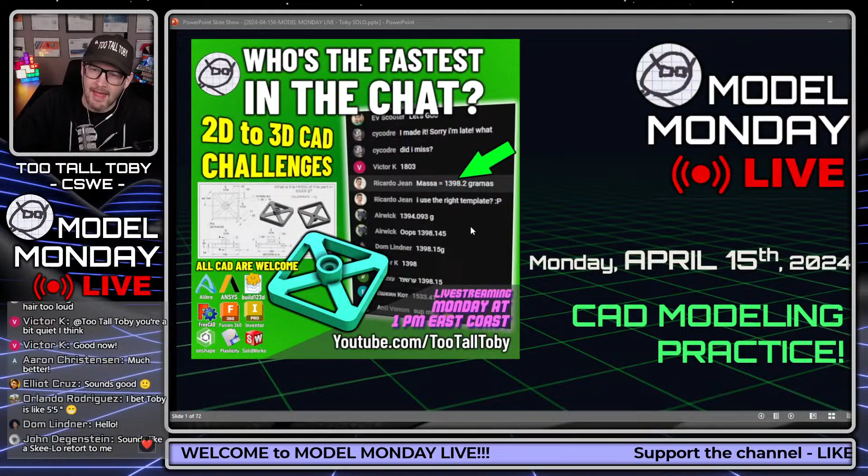So let's get right into it here. Model Monday Live kicks off April 15th with some 3D CAD modeling practice, some friendly competition amongst the chat. Who is the fastest 3D CAD modeler in the chat? That's what we're going to find out today on this episode of Model Monday Live.

Look at that, it looks perfect. Aaron C says he's been traveling a lot the past couple of weeks, so he hasn't been able to participate, hopefully he can catch up on the leaderboard today. Well Aaron C, we've actually been off for the past 2 weeks, so perfect timing, we took off. We knew you were traveling so we took off for a couple of weeks, now we're back.

It says hopefully I can catch up on the leaderboard today. Yeah, the Model Monday Live leaderboard at TooTallToby.com, everybody's vying for first place on that leaderboard. Aaron says, I plan my trips around TooTallToby Model Monday. Yeah, that's a great strategy, solid strategy.

So today we're going to do 2 CAD speed modeling challenges for the chat. Anybody who's in the chat using any 3D CAD system can participate, and we're going to find out who is the fastest in the chat. We're going to do a little bit of a tournament and news update, we're going to do a live solve using SolidWorks, and of course we're going to interact with the best chat ever.

I'm going to live solve this one today. I had somebody in the comments say they wanted me to solve this using SolidWorks. So this is one that came from the tournament, the square cap. We also had this one as a practice model, so we're going to do this as a live solve a little bit later in the episode today.

Pretty straightforward part, but I think it's good to kind of go over some of these straightforward parts. It doesn't matter if it's a tier 1 or a tier 5 or even a tier 10, it's always good to have the opportunity to talk through what we do whenever we're looking at a 3D model, whether it's a very simple model or a more difficult model.

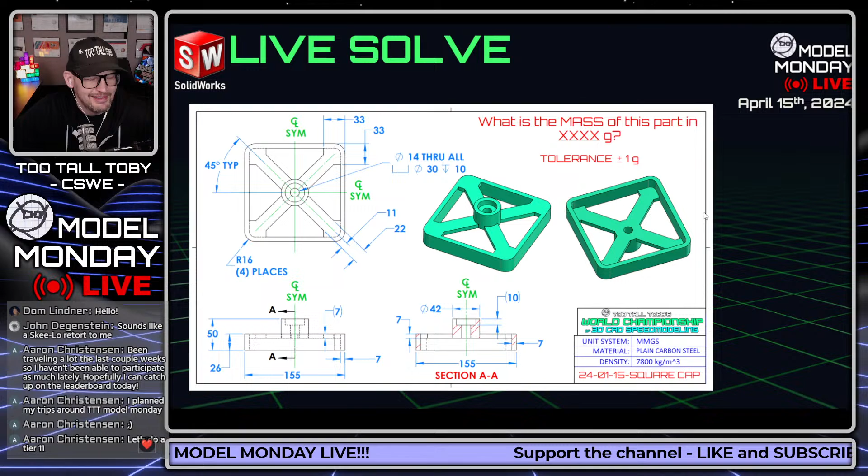Aaron C says, let's do a tier 11. Let's go. I'll just show you a picture of a guy's face, say hey, model this. First person to get it right wins.

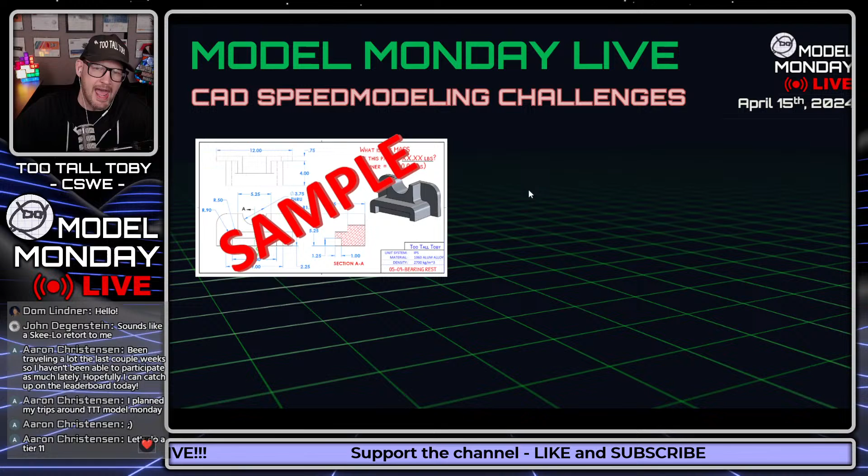In these CAD speed modeling challenges, I'm going to show the chat a 2D print, and ask you to turn that into a 3D model as quickly as you can. You're going to try to calculate the mass of that 3D model and input that mass directly in the YouTube chat. Whoever comes up with the correct mass the fastest will be declared the winner.

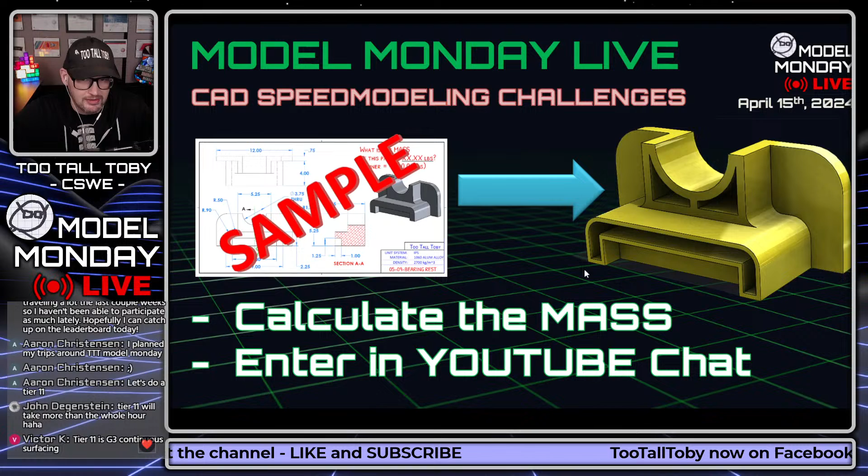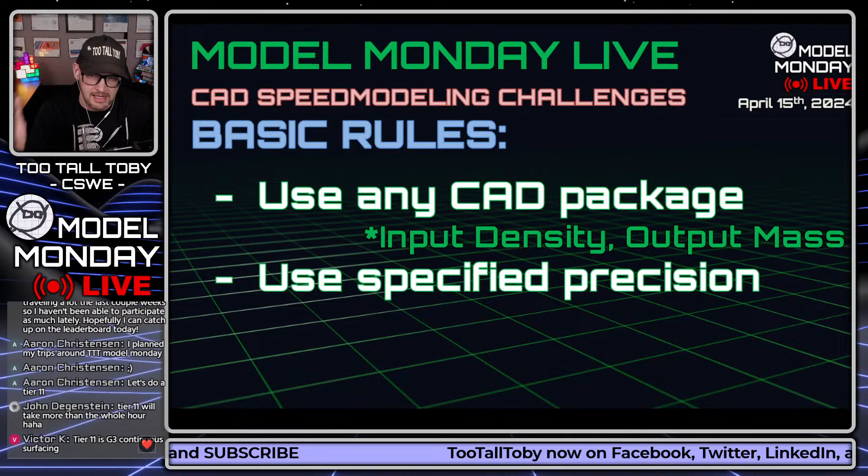The basic rules are you can use any 3D CAD package as long as you can input density and output mass. You need to make sure you use the specified precision. If the model is in inch, pound, seconds, and the answer is 0.xxx pounds, use the specified precision, or you could go more precise. But if you go less precise, you're probably going to go outside of spec. The first correct answer in the chat will be declared the winner.

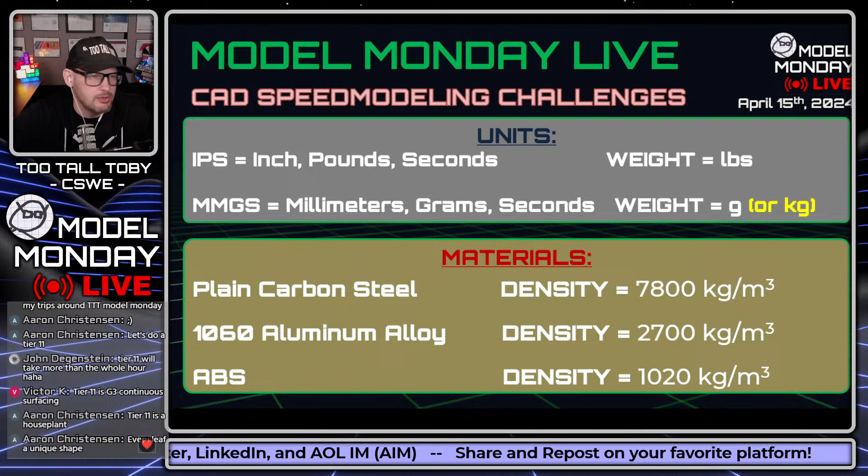The units we work in Model Monday Live are shown here on the screen. If you're here for the first time, take a sec and grab a screen capture of these units, and especially of these materials, because in your CAD system the materials might be a little different. I've got a tutorial on the Onshape YouTube channel showing how to create custom materials in Onshape. But if you're using a different CAD package like Fusion 360 or FreeCAD, you might have to go through and create your own custom materials.

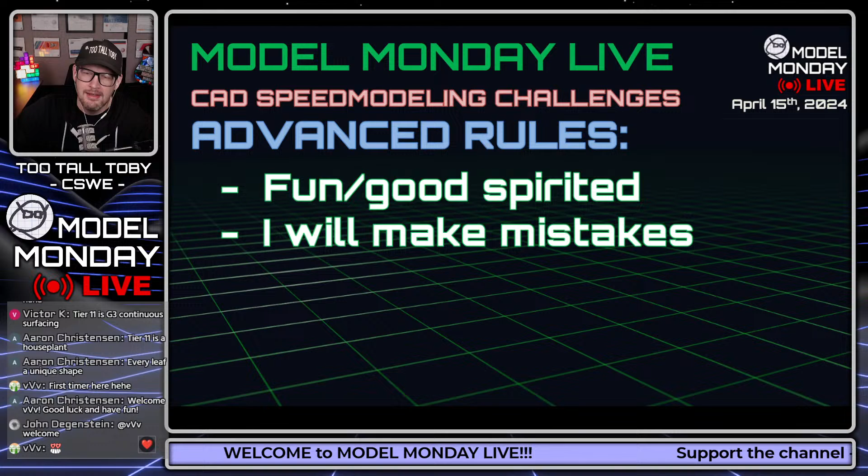The advanced rules are, this is meant to be fun and good-spirited. Occasionally I make mistakes, I include the incorrect density on the print, or maybe have a bad dimension, or a tolerance that's too tight. If that happens, we'll just call an audible and figure it out. And the Ivan exploit is permitted. Video coming soon demonstrating the Ivan exploit.

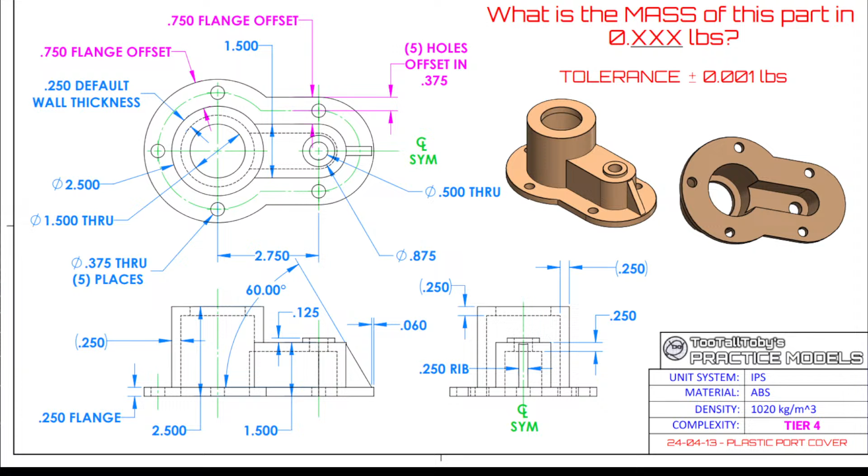And those holes are offset in from the outer rim at 0.375. The model has a consistent wall thickness of 0.25 default wall thickness, except in that one area where you can see there's a little raised, 0.125 raised area. That is the plastic port cover, a new model for this episode of Model Monday Live. Trying to make sure I keep giving you guys as many new models as I can.

Let's see what we can do about getting this centered on the broadcast. There we go, it's just that easy. A new model for this episode of Model Monday Live, 24-0413. Tier 4 model, kind of in between Tier 3 and Tier 4.

But really Tier 4. I'd say actually, maybe I'm being a little too rough there. It is really like square in the range of Tier 4, if we look at our tools that we use to calculate the tier ranking for a model like this.

Da Vinci is here in the chat. What's up, Da Vinci? Welcome, welcome. All right, good luck to everyone.

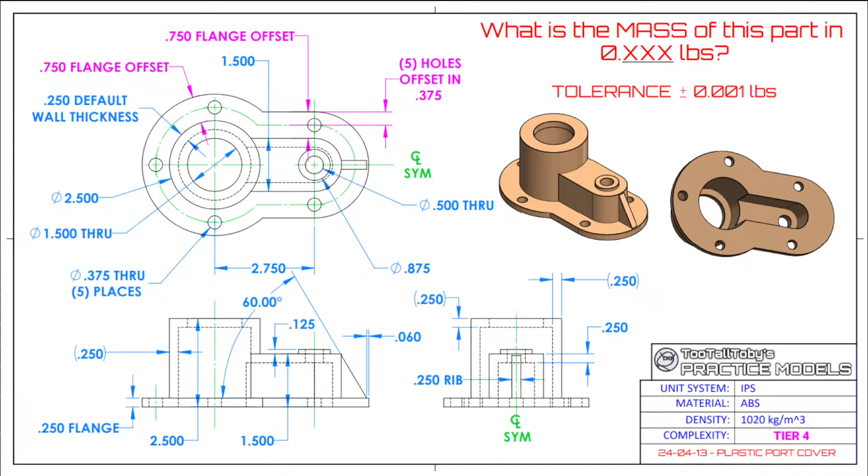Turn that into a 3D model. Tell me what the mass is: 0.xxx pounds. Tolerance is plus or minus 0.001 pounds. Very tight tolerance on this one. Usually it's around there though, right? Sometimes it's even tighter. All right, good luck creating this model. This will be a fun one, I think, for everybody out there, depending what CAD system you're using.

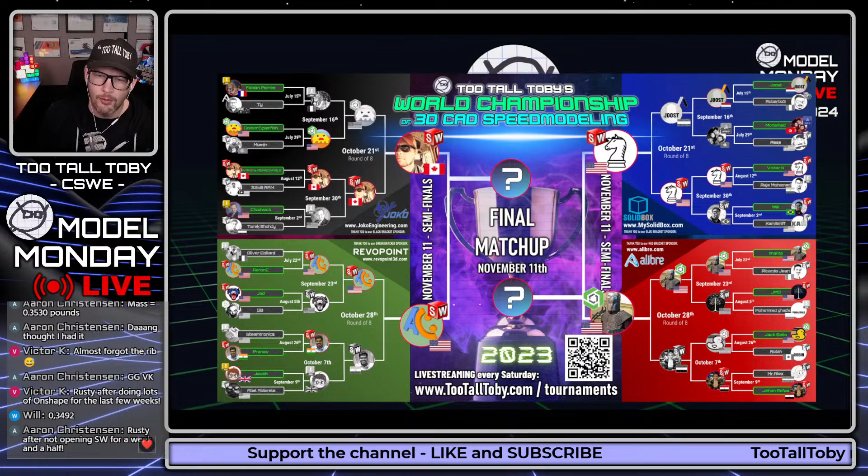Of course, last year we had the World Championship 2023. We had 4 amazing finalists, 2 of whom are here with us right now today in the form of Victor K and Aaron C. And then, of course, we also had Ivan the Reasonable and Imants going into the Final 4. And it was none other than Victor K himself who took down the entire tournament. First place in that tournament, some great prizes, some prize money. And so we're looking forward to seeing what happens in the World Championship 2024.

Of course, we're going to make some changes. We always are trying to mix things up a little bit, really dial in the formula. So we are going to make some changes going into the World Championship 2024.

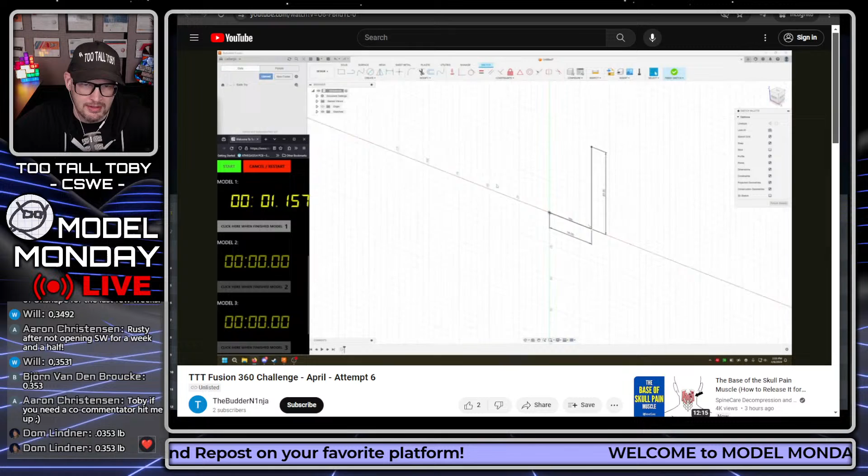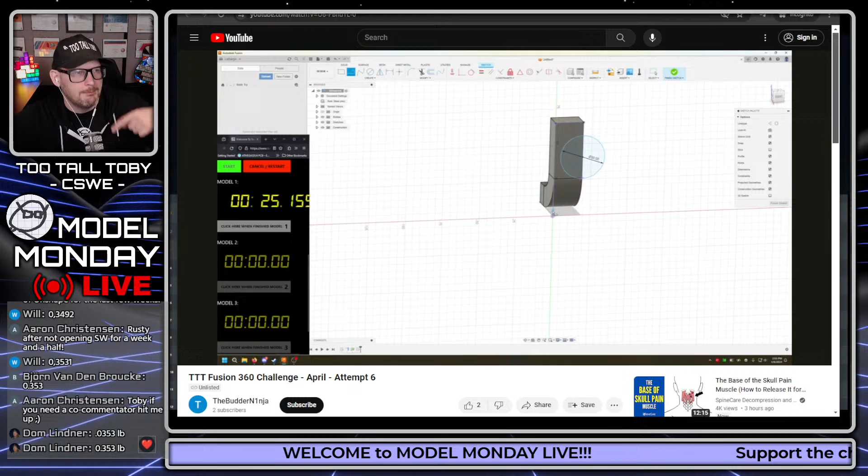One of the things that happens in these runs is that you've got the ability to exploit your CAD software if it remembers things. What I mean by that is, if we're running this here, look, this is running in real time, this is Fusion 360 running in real time on this run. You can see that for this first model, the user created a line horizontal, created a line vertical, and then went into that thin feature extrude really, really fast. Now, why did that happen so fast? It happened because the software remembered what the thin feature extrude parameters were from a previous run. The software just happens to be set up so that it remembers.

This is what Fusion does. SolidWorks does this as well, and you're going to see it here again in just a moment. So here you see that cut extrude. Now, watch this hole wizard that the user puts in here. Look at that.

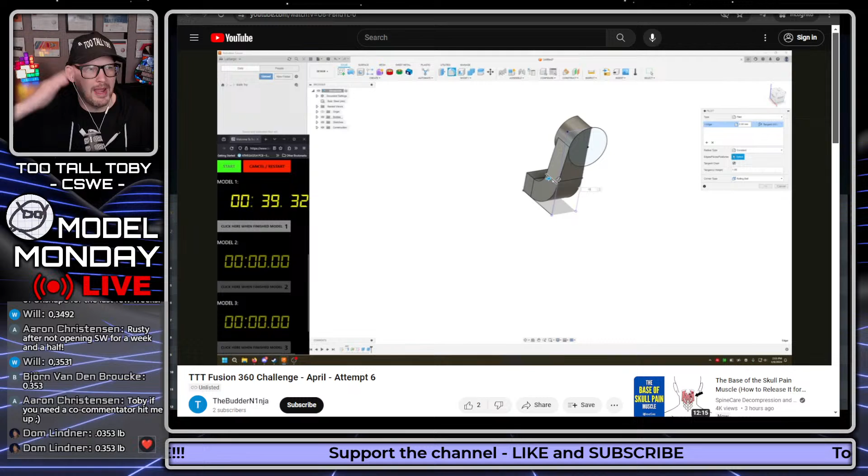That was like one click. I'm going to rewind it there. One click and the hole wizard just ended up dropping in the correct size hole. Well, this is the same thing that SolidWorks does. SolidWorks remembers what parameters you used the last time you used Hole Wizard.

And this is Fusion 360 we're looking at here. It's not called Hole Wizard, but the hole creation tool works the same way. Here, I'll rewind it one more time. So you can see the user just was ready to create that hole, clicked on that point, boom, the hole gets created, dropped right in the exact correct spot with the exact correct parameters.

And this is actually an exploit that I've included in the rules. So here, if you look at the leaderboard challenge rules, you can see it's rule 3E. Some programs like SolidWorks will remember your settings from the previous use of a command. This is an exploit which is allowed for submissions to the monthly leaderboard. If you can figure out a way to work this for your program, go for it.

And so it's one of these things where Dom is saying he wasn't sure if that was allowed, if we had to clear the whole custom hole wizard sizes. No, I can't stop this, like I wouldn't allow it if you went into Hole Wizard and pre-populated a list of all the custom holes used for that challenge. I wouldn't allow that. I would consider that against the spirit of the contest, because you're specifically programming that list for this challenge. So I think that would be off limits.

But the software remembering what you did on the previous run, I can't really stop people from doing that, because what am I going to say? Am I going to tell people whenever you go into Hole Wizard, you have to delete the value, which is the correct value, and then retype it in? That seems a little crazy that some people would have to do that. And it would be very hard to convey that as a rule as well.

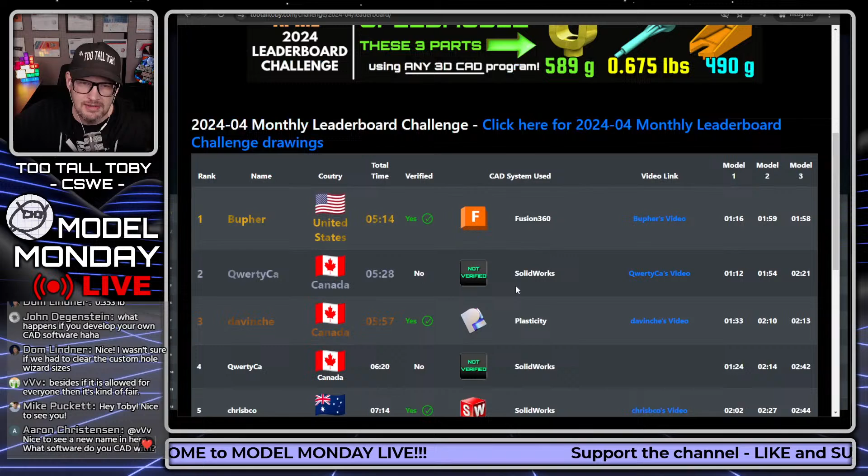And sometimes it's nice just to see other CAD software, like DaVinci went in and did a run in Plasticity. Awesome. So a little later today, oops, maybe I wasn't showing my screen for that when I went back and showed that again. But DaVinci, you can see here, went in and did a run in Plasticity, so you can watch a video of DaVinci running Plasticity, doing the leaderboard.

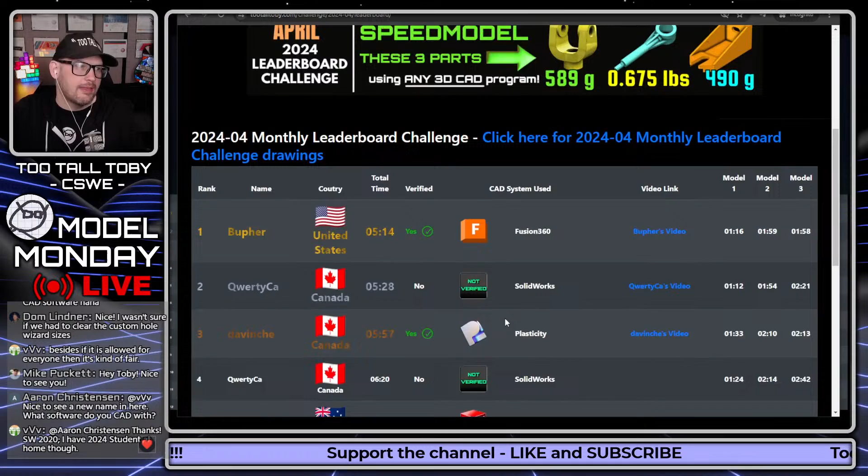Later today, I'll go in and I'll get QWERTY's run and verify it. I'll delete this extra run down here. There's also a new rule in the leaderboard now where you can run it using multiple CAD systems.

So here, if we look at the rules again, the way your time will be shown is once you submit your time, you can continue submitting speed runs to get better times. Your fastest time will be considered your official submission. All slower times will be deleted.

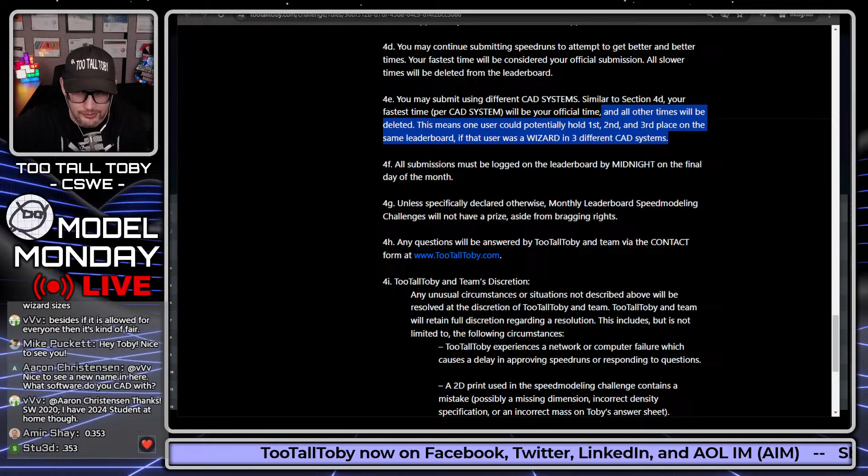But then here it says you may submit using different CAD systems. Similar to section 4D, your fastest time per CAD system will be your official time, and all other times will be deleted. This means one user could potentially hold first, second, and third place on the same leaderboard if that user was a wizard in 3 different CAD systems. Pretty cool stuff. You can actually run it using multiple CAD systems now.

Take a look, there's a new section for the video rules. If you want to see me going through and explaining the new rules, those are all listed here. If you want to see my run from April using SolidWorks, that's shown here too. And if you want to give it a try, the leaderboard is up, running, and active.

And of course, we're still releasing videos all the time. Lots of power moves, lots of practice models, lots of shorts. We're doing shorts every single day, every single day since January. We're almost on day 100 of releasing a new short every day.

One thing that's kind of cool about the shorts, I didn't really think about this until just recently, but the way I'm doing those shorts is it's always one run, almost always one run. There's almost never any edits in those shorts. So it's like I'm giving myself a new engineering constraint.

I need to convey to you a pro move that is going to be valuable to you, but I need to do it in less than 60 seconds, and I need to do it without any editing. So whenever you're watching them, or if you share that with somebody else...

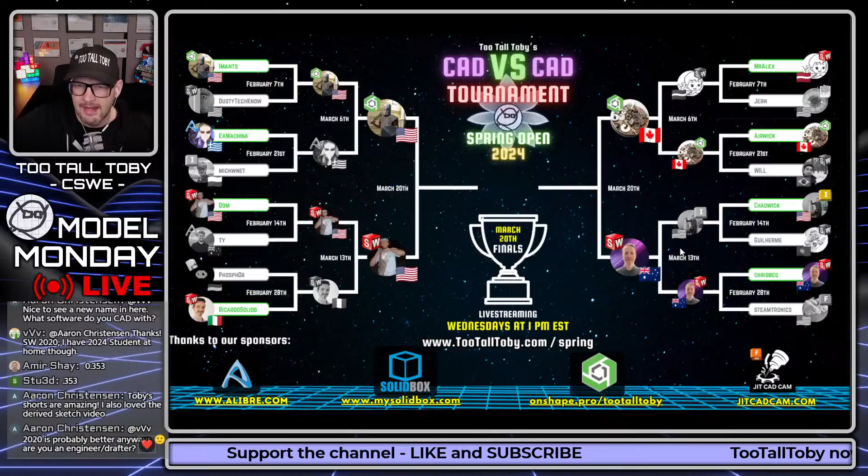Alrighty, and the Spring Open Final Four recap. Imants, once again, in the Final Four, very nice. Dom, Airwick, and ChrisBCo were all in the Final Four, and it was none other than Airwick who took it all down, our 2024 Spring Open champion. The reason I'm mentioning that is because Airwick is going to be joining me next week on Model Monday Live. We got a special guest next week, our winner from the Spring Open is going to be here and joining us. So very excited to sit with Airwick and talk to him about his strategy for these modeling challenges.

We often see him here in Model Monday Live, we always see him in the practice models, regular here on the show and in the community, and very excited to talk to him next week about Onshape and why he switched from SolidWorks to Onshape and how he was able to lock down that win.

Airwick had a brutal path to victory, and a lot of his matches went to 3 matches. It was really cool. So maybe I'll put together a highlight reel of all Airwick's matches all the way through the tournament, because that would probably be a lot of fun to watch.

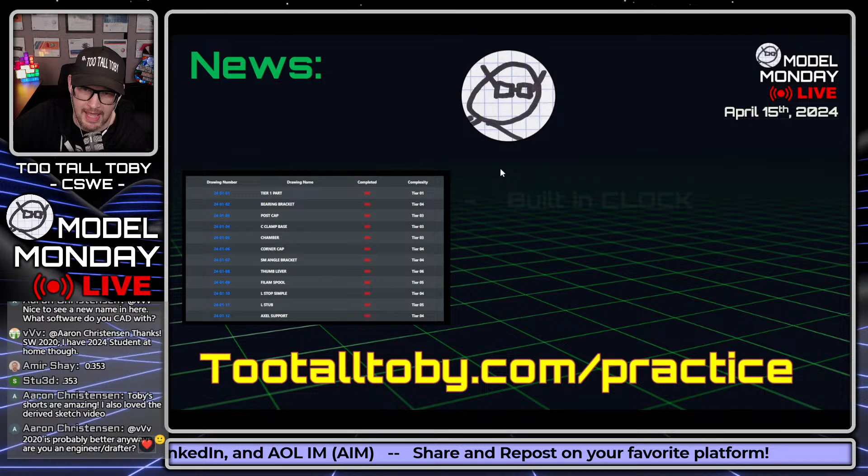All right, I think that's it for the TTT news for now. The practice models update - yeah, we do have a practice models update. There's 34 models up there now. So good luck if you want to do the practice models. They're a lot of fun.

There's a built-in clock, there's tiered level difficulty. If you haven't checked out TooTallToby.com before, when you go there, the idea with this page is there's basically 3 avenues you can go down. You can go down free practice, which is like you against yourself.

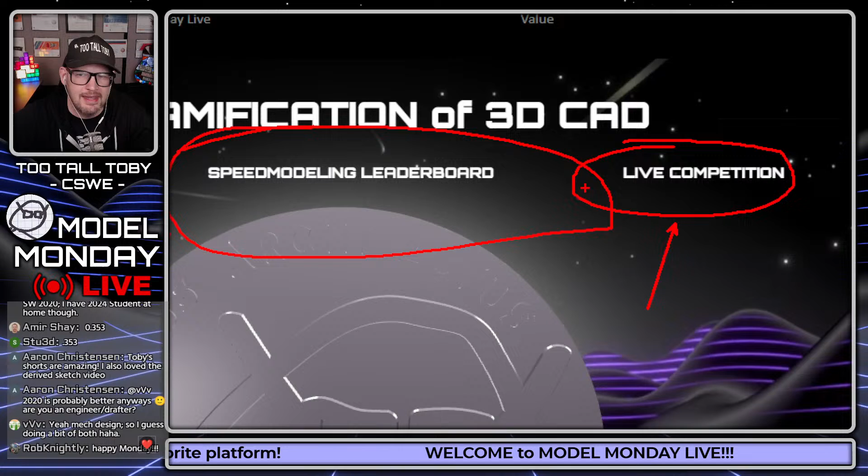You're not going against anybody other than yourself there. There's a speed modeling leaderboard where it's you against the community, but you can practice as many times as you want over and over again. Or it's the live competition, you versus somebody else, CAD versus CAD. That's like the Model Monday Live and the tournaments. Those are the 3 avenues you can go down on the website.

We talked about the speed modeling leaderboard a moment ago, but the free practice is a little different. With the free practice, we have these challenges where you get into the challenge, and once you get in there, there's going to be a clock, and you're going to see how long it takes you to complete that challenge. This one took me 6 minutes and 58 seconds to complete.

We're actively working on this section of the website right now, the Practice Models app. We're going to give you guys more and more functionality, but just keep in mind that as you're going through those, it's intended for you to look at the print and do the challenge. You're not supposed to go back and keep trying or peek at the print ahead of time or anything. It's really meant to just look at the print and then do the challenge.

So if you want to check this out, TooTallToby.com/practice, lots of free challenges in here for everybody to try. I think we're up to 34 now. If we go to the community scoreboard here, you can see, yeah, there's 34 total. And you can also see here that there's over 200 people that have done at least one.

So it's been a lot of fun getting this out. Look, we got a Creo guy in here. That's pretty cool. It's been a lot of fun getting these out there.

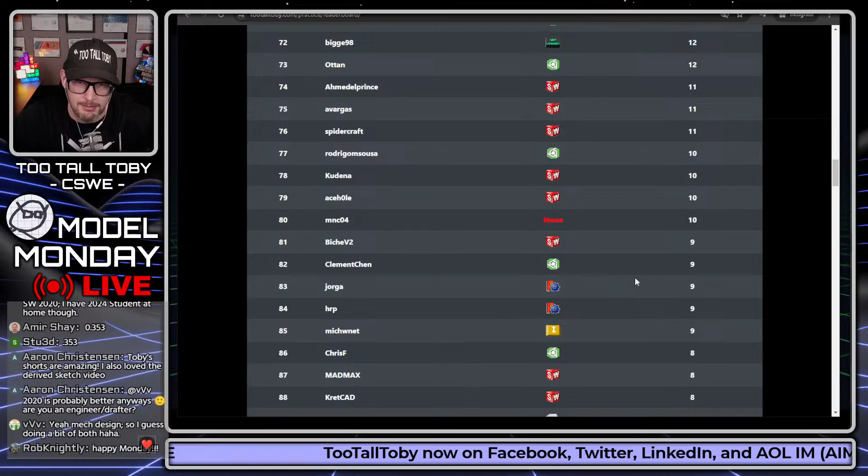And I'm going to continue releasing these models. There'll be more that go up today, and they are listed by tier. So if you only wanted to do certain tiers, you could turn on the filter here and say, I only want to see tier 1, tier 2, and tier 3. I don't want to do any of the other ones. I just want to challenge myself to do these ones here.

So you can filter these whether you're looking at it in the grid or in the standard view. These are all tier 1, tier 2, tier 3. If you're not ready for anything higher than that yet, that's fine. You can just start out on those beginning ones.

Rob Knightly here in the chat. What's up, my man? And I saw Mike Puckett in the chat too. What's up, Mike? Welcome, welcome. Thanks for joining us. I saw you pop in there, say hello. Always great to see Mike here in the chat. Old friend of the show and old personal friend as well.

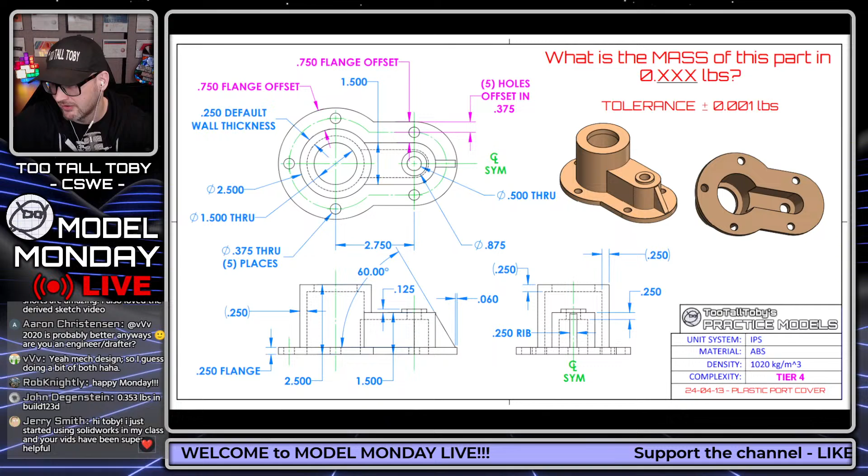Hi Toby, I just started using SolidWorks in my class, and your vids have been super helpful. Thank you, Jerry. Don't forget to check out TooTallToby.com/practice as well, more great practice for you and for your class. Are you a teacher or are you a student in that class? Let us know, let us know.

All right guys, let's take a look here, see how we're doing for this first challenge. I saw Victor K came in with the first answer and then like an insta revise. So here on Model Monday Live, you can answer and then you can revise.

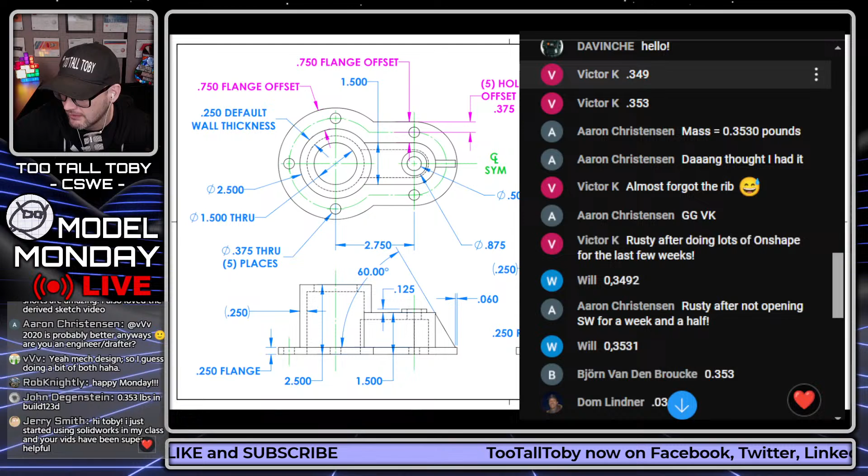0.349, Victor K. 0.353, Aaron C. Aaron C says, dang, I thought I had it. Victor K almost forgot the rib, GG Victor K. Okay, Will from Brazil, 0.349, matching Victor K there. Oh, Will revising, 0.353. Bjorn, 0.353. Dom Lindner, 0.353. Amir, 0.353. Stu 3D, 0.353. Very nice, very nice. John, 0.353, built in build 123D. Very, very nice.

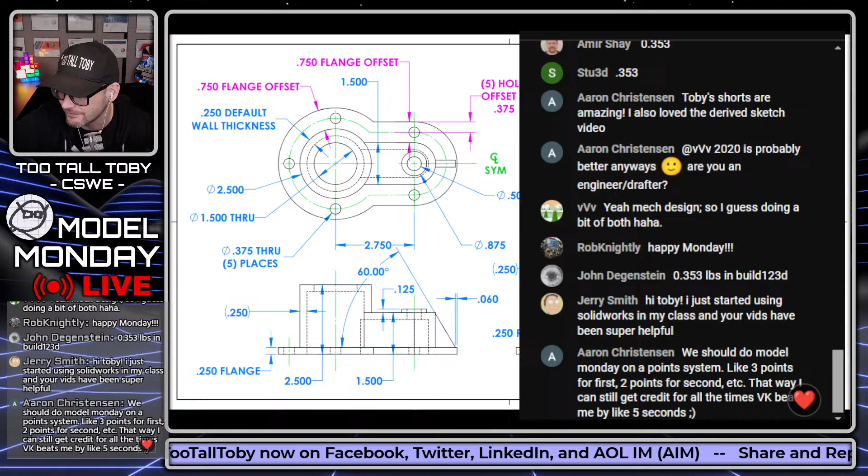Aaron C says we should do some kind of a gradient system. Yeah, we've thought about that too, Aaron C. Totally legit suggestion.

When we visit TooTallToby.com and go to Model Monday Live, you can see we do keep track of the points, but maybe having more of a gradient system. It's a process, we're developing all these different apps.

Right now our main focus is on practice models. We're really focusing on practice models. We did a little revamp of the leaderboard.

You noticed last month the leaderboard now is tied into your user profile. So when you go to edit profile, this information has to do with the leaderboard. This My CAD info ties into your leaderboard submission, as well as the monthly leaderboards, and this is where you post the link to your video run.

So everything is linked to from the leaderboard, from the speed modeling leaderboard. It's all linked back to your profile. That was a huge revamp that we did this past month.

And now we're really focusing on the practice models app. We got the leaderboard app updated, now we're really focusing on the practice models app. And then eventually we'll get to the Model Monday Live app, and we'll have a little more integration with that into the whole system too.

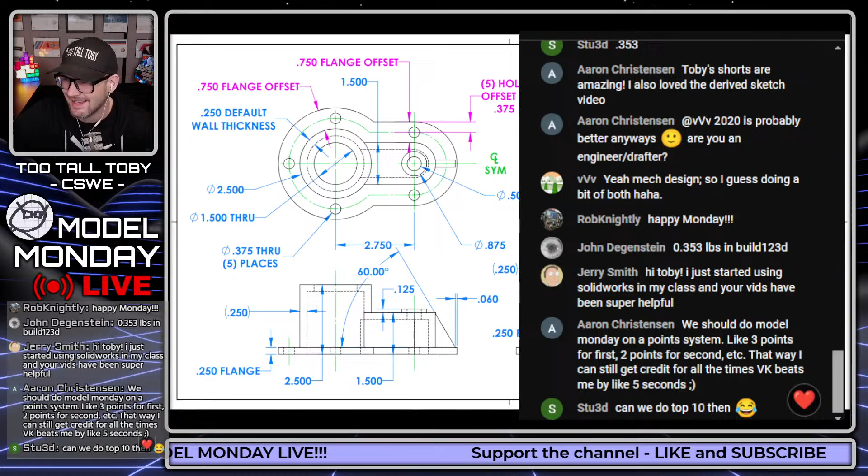So great suggestion. Stu3D in the chat says, why don't we just make it the top 10? I like that too. Great suggestion from Stu3D. Make sure that we get everybody in there - everybody who enters an answer will get in there.

Our very first answer came in from Victor K, 0.349. Victor K then revised to 0.353. The correct answer is 0.353. So GG to Victor K for getting that answer and getting it correct first and earning that point on the Model Monday Live leaderboard.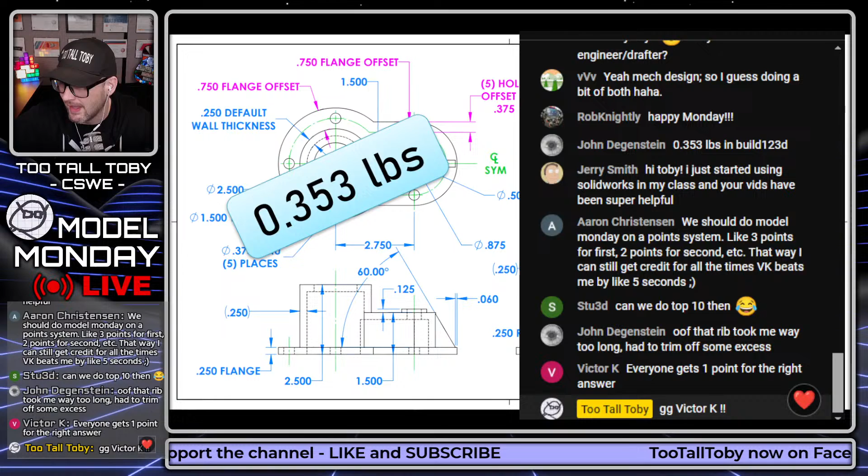GG to Victor K. Everybody give Victor K a GG in the chat. He is currently the world champion of 3D CAD speed modeling. Very impressive, continues to dominate in the streets. That's what we like to see. Who's going to take him down?

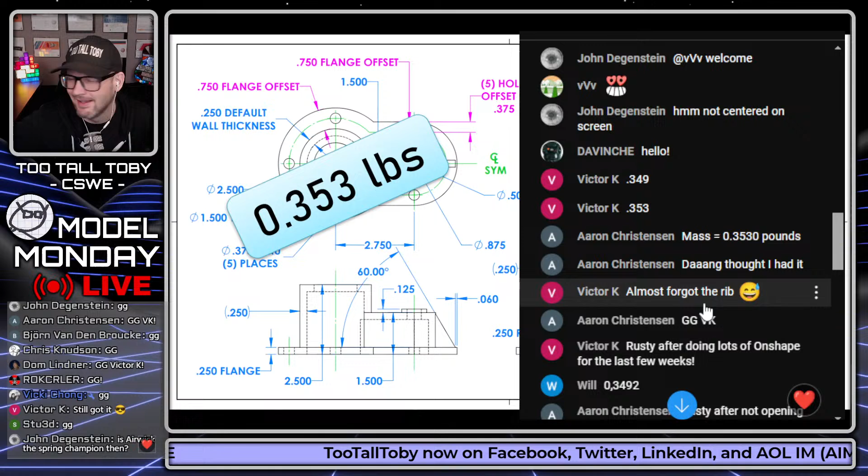You know, to be the best, you got to beat the best. Don't forget - I forget what movie that's from, but I'm sure it's important. If anybody can remember what movie that's from, tell me, and then I'll remember. Then I'll be like, oh, that's right, I just watched that movie. So, to be the best, you got to beat the best.

All right, congratulations to everybody who got that one correct, and let's move on to our next challenge today. Is Airwick the spring champion then?

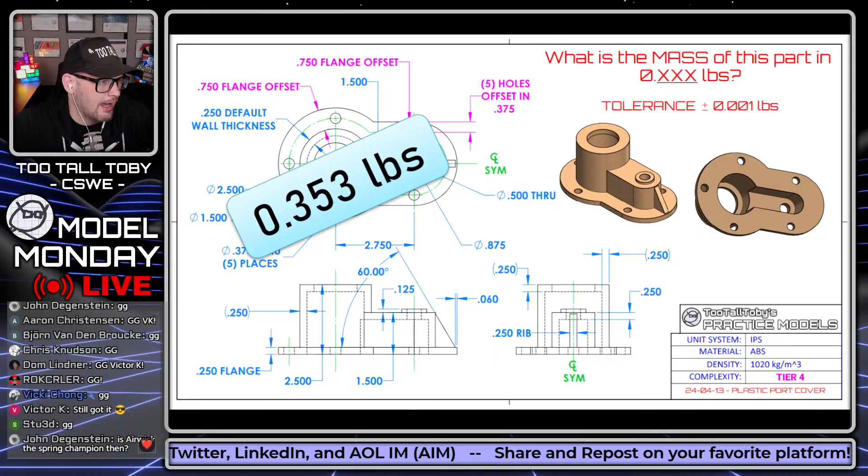Yeah, I mean, the spring opens are a little bit more casual. We don't have the international 3D CAD speed modeling regulatory board breathing down our necks the way we do during the World Championship. So it's a little bit more lenient in the Spring Open - it's almost like an exhibition type tournament. Airwick is the champion of the Spring Open for sure, but there's only one world champion per year in that international speed modeling sanctioned tournament, the World Championship.

PCRduino says he's teaching too many classes as of late. Oh, well, we're very glad to be here with you, PCRduino. Thank you so much for joining us, and thank you so much for being a teacher.

All right, guys, here we go. Next challenge. Challenge number 2 on this episode of Model Monday Live begins in 3, 2. Get your screen capture software ready. This challenge begins in 3, 2, 1, go.

What is the mass of this part in XXXX grams? Tolerance is plus or minus 1 gram. This part's made from plain carbon steel. We're back to millimeters - everybody loves millimeters. This is a tier 5 part.

Now, why is this a tier 5 part? Because it's a little bit tricky, that's why. It being tricky bumped it up from tier 4 to tier 5. So a little bit of a tricky part here.

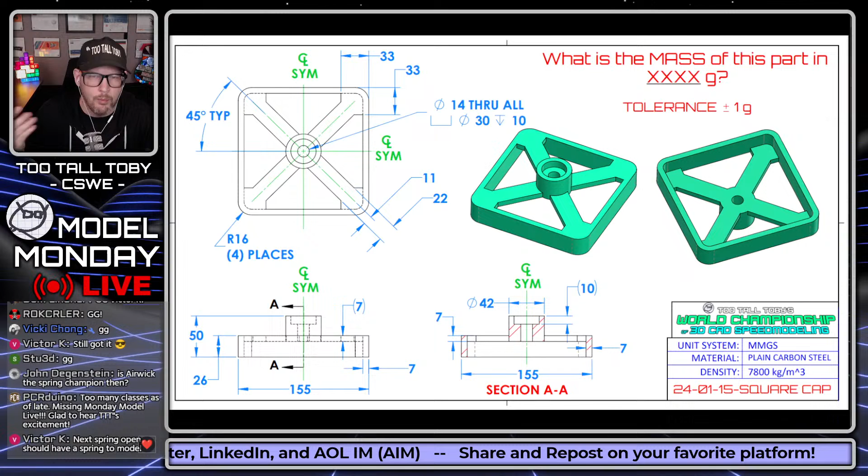So when looking at a model like this, and really when looking at any 3D CAD model, you always want to follow the same basic process of coming up with a game plan. So before you launch your 3D CAD software, before you start your first sketch, you really want to come up with an idea of what am I going to be making and in what order am I going to be creating that geometry. And there's some key questions you always ask whenever you're starting a new model.

The key questions you want to ask yourself are: where is the origin going to be located, and what is my very first sketch going to look like? A lot of times we call this starting plane, starting profile, and origin location. Starting plane means is it going to be on the front plane, the top plane, the right plane. Starting profile means what is my very first sketch going to look like?

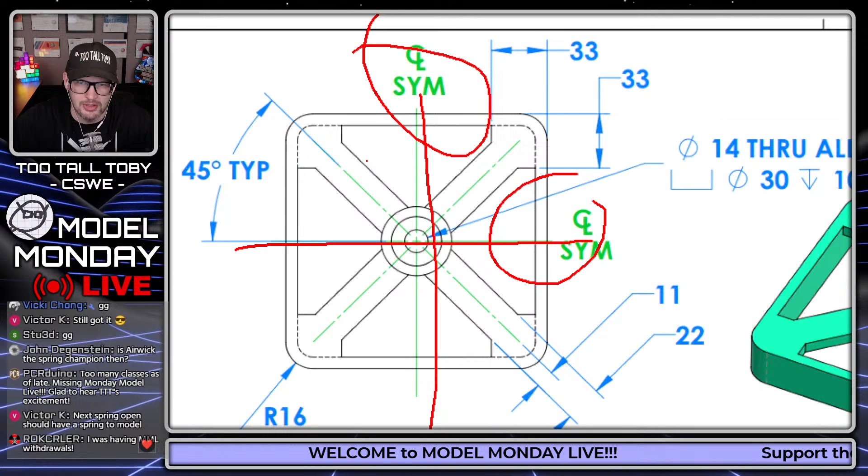Now, the way we come up with the answer to that question is we first start out by looking at does the model have symmetry in one or more directions? So this model does have symmetry in two directions, straight down through there and then across. We've got these centerline symmetric indicators. So whenever you have two lines of symmetry intersecting, that usually means the origin is going to be at that intersection. So the origin is probably going to be right here at the center of the part.

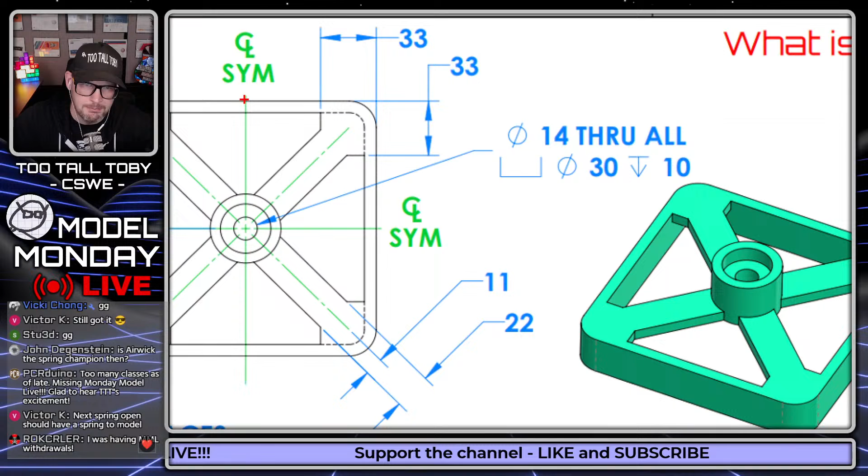Now the next thing we want to ask ourselves is does it make sense to create half the model or a quarter of the model and then reuse that geometry? And I think in this model it probably makes sense to do that. We could just create a quarter of the model and then mirror it twice. So now we know that we're only going to be creating a quarter of the model, which means that our first profile is going to look something like this, just one quarter of the model.

And once you have that first sketch planned out, you can extrapolate from there to figure out what the rest of the modeling process is going to look like. So maybe if the first sketch looks like this, then our first feature is going to be a solid extrusion that comes down and creates that first region of the model. Then we can maybe shell that solid extrusion to give ourselves a hollowed out version of this thing, kind of hollow this out a little bit. And then we could cut away this rib shape here.

And so at that point, what I would probably do is mirror that, and mirror that again, so mirror it in the two directions.

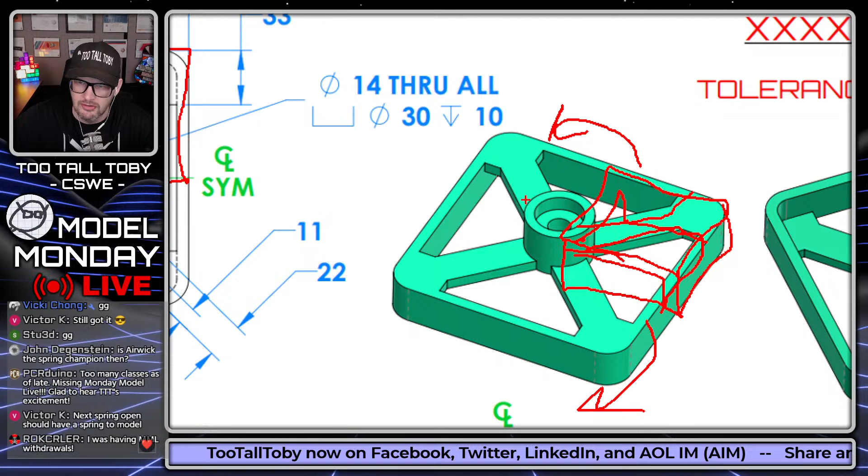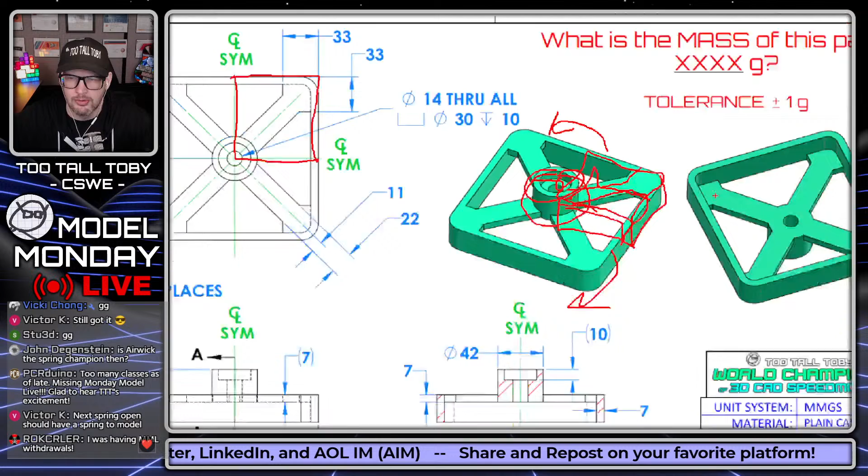And then I would finish up with this extrusion up top here and the counter bore that's going down through that extrusion. So this is the process you want to get into in your head. Whenever you're looking at a model, you always want to start out by thinking, what's my first sketch going to look like? What's my first feature going to look like? But you also kind of want to go through and think about what the entire model is going to look like as far as the different steps you're going to be doing as you go through and create the remainder of the model.

So now that I've got this basic plan in place, I just want to look at the model, see if there's anything tricky about it. It doesn't really look like there's anything that tricky. There's no crazy trigonometry I have to do or anything like that. I think the main thing is just going to be deciding how I'm going to handle this region as I'm designing just one quarter of the model. So let's get into it here. Hopefully the geometry will just kind of resolve itself in that center region. But if it doesn't, I'll come up with something as far as a solution goes.

So I'm using Windows snipping tool here, just grabbing a snippet.

ROKCRLER said, I was having Model Monday Live withdrawal. Yeah, well, it's great to see you in here again, ROKCRLER. Thanks for joining us again, bro.

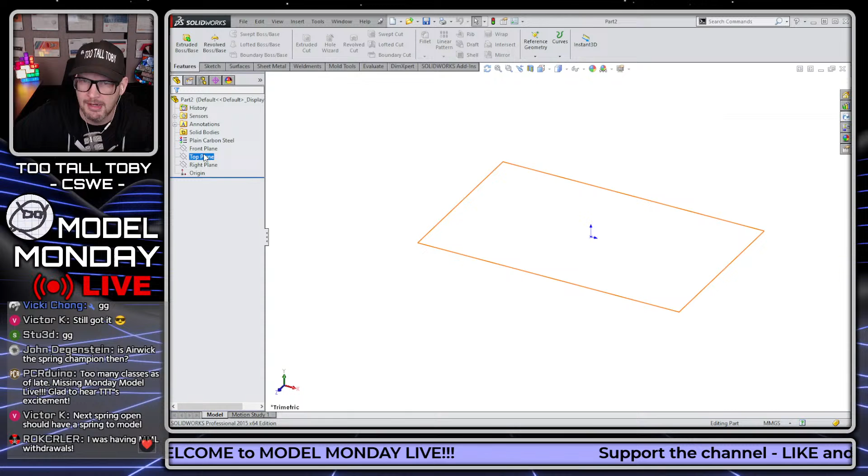All right, so let's get into it here, and we are going to jump into SolidWorks. We're going to make a new part here. This part is going to be in millimeters using plain carbon steel. So I do have some templates set up here to help speed along that process. And then I'm going to go to the top plane, begin to sketch, and I'm going to create a rectangle. So top plane, begin to sketch, S key, rectangle, single click the origin, move out here, and then I'm going to drop in the lines for that rectangle.

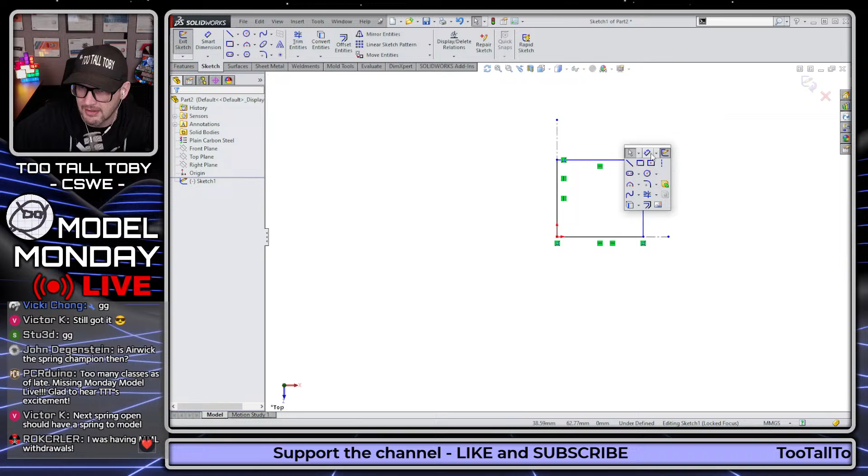Now, I could either drop in these lines for the rectangle ahead of time, or a little trick I like to use sometimes is I will create some center lines if I know I'm going to be using doubled geometry. So I'll create some center lines here, and then I can create a dimension from here to the center line and give that a distance of 155, and I can create a dimension from here to the center line and cross over and give that a distance of 155. And that gives me a nice, simple fully defined sketch to get things started.

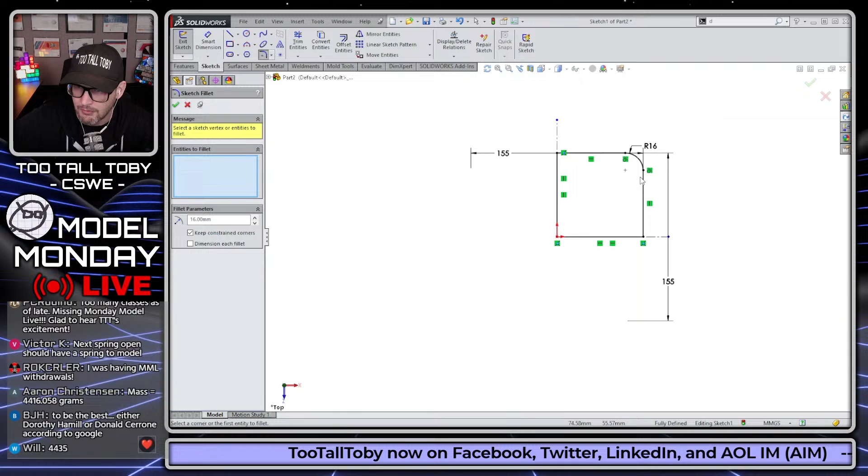It's always good to start out with simple geometry. Keep your sketches simple. So could I go in here and add that corner radius in this initial sketch? Absolutely. But whenever you add a radius, you're going to end up with additional tangency relationships, and sometimes you also get intersection points. And it just seems to me like maybe that's a little too much, a little too busy for this sketch. So a lot of times I try to keep my sketches simple.

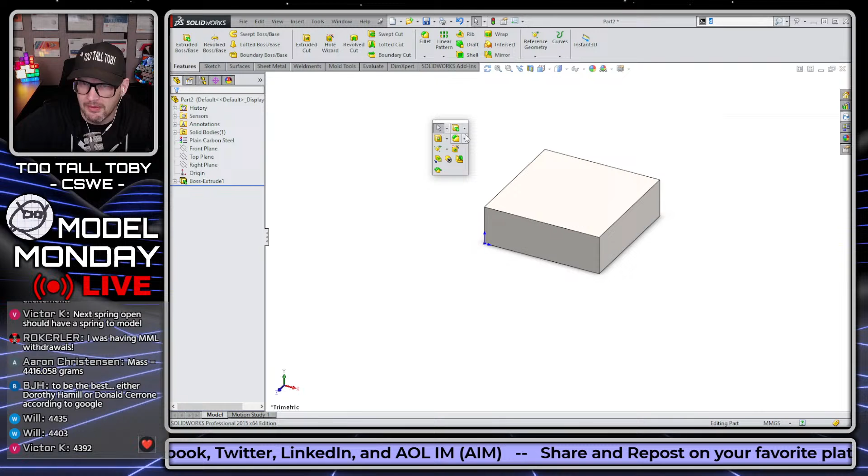So I'll just create that geometry, extrude that up. That's going to go up to a height of 26 millimeters. There we go. And then I will add a fillet. So S key, fillet, just pressing S on my keyboard, 16 millimeters, and add a fillet here right on that corner. And then if we want bonus points, we can go in and change the color of this part to kind of match the color on the print, also maybe make it a little easier to see as I'm going through the model.

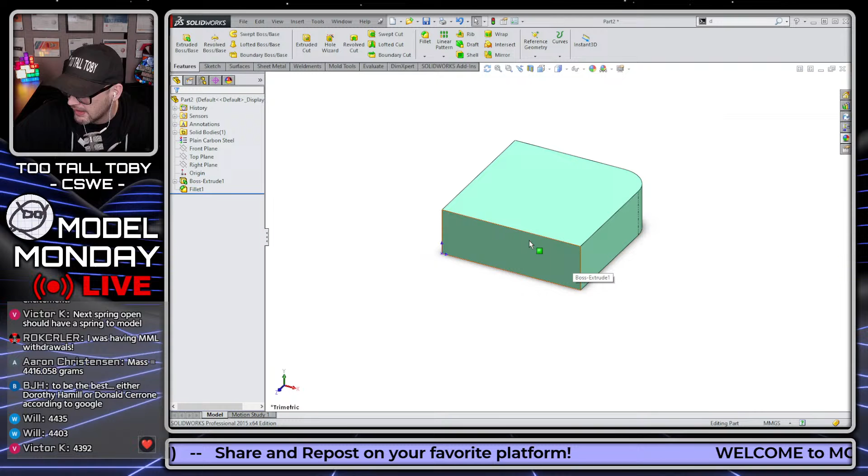So now I'm going to be creating the removal of that material from the underside. It looks like the wall thickness on the top of the model is 7 millimeters, and the wall thickness on the sides of the model are 7 millimeters. So that says to me, let's do a shell. And with a shell command, what you do is you pick a face, and then the geometry from that face is removed, and the geometry from all the other walls is offset.

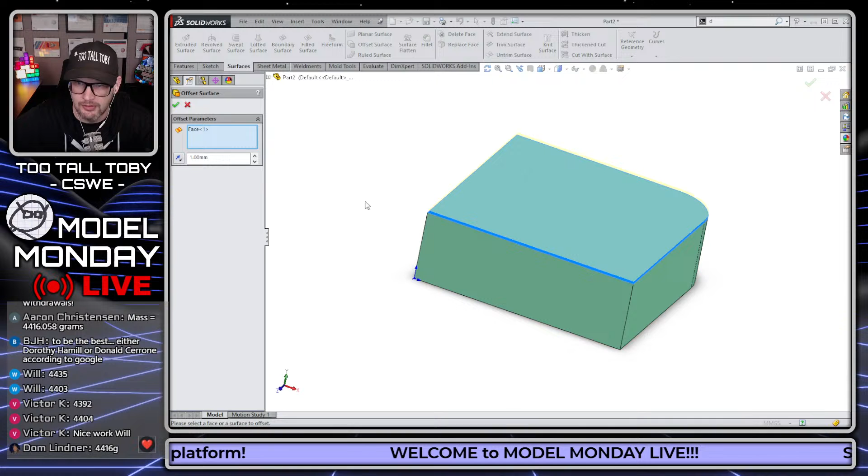This is performing what's called a surface offset. So it's actually taking this face here and going into surfaces and doing offset surface at the distance that you said, 7 millimeters, reverse the direction. There's that offset surface at 7 millimeters. You can kind of see it here along this edge, offset surface at 7 millimeters. Well, SolidWorks is doing that all throughout the model, leaving us with this kind of interior geometry.

If you've ever used a shell command before, you're actually doing surfacing, believe it or not. But it just kind of takes care of all that behind the scenes for us.

So this isn't quite what I want. Let's edit that shell command, edit feature. Let's say we also want to remove this face and this face. And now all the remaining faces are offset to 7 millimeters, and that looks like a pretty good start for this model.

So now we've got that shell in place. Now let's select this face here, begin a sketch, and orient our view. I did that with a Control 8.

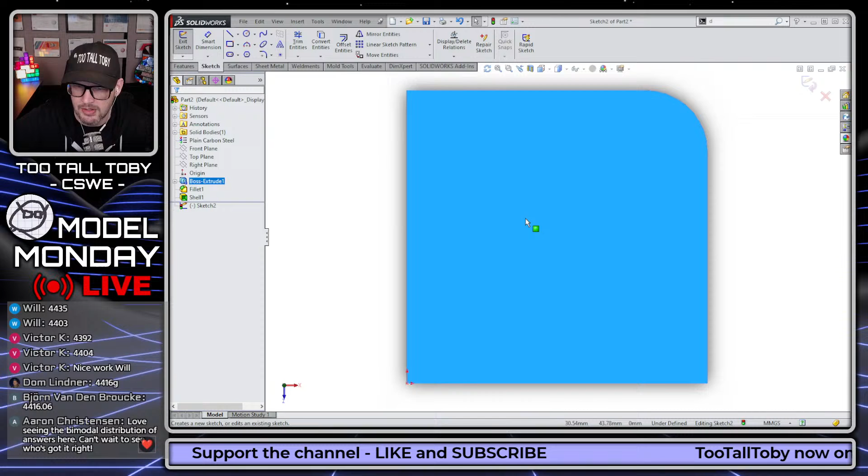Now we're going to create a line here. I'm just going to do this with a center line. Just create a center line here and then put in a dimension at 45 degrees. That should kind of help me get things aligned. It's also going to give me an option to maybe mirror the geometry when I'm done.

So now I'm going to create a regular solid line. S key, line, start here at this edge. And now I want this line to be parallel to that center line.

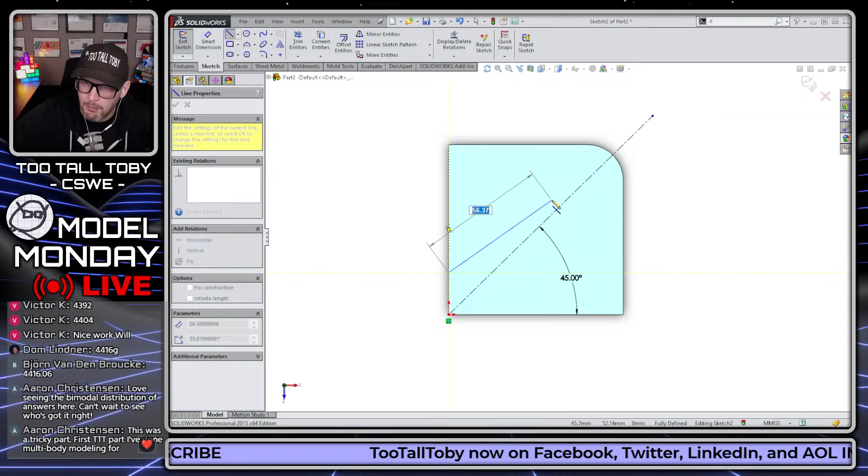In SolidWorks, a lot of times if you just hold your mouse over an existing entity and then move back, you'll see that you're picking up on that yellow sketch relationship indicator, which is telling me that it's going to add that relationship. So I'm going to end up with a yellow sketch relationship. Let me just do that again.

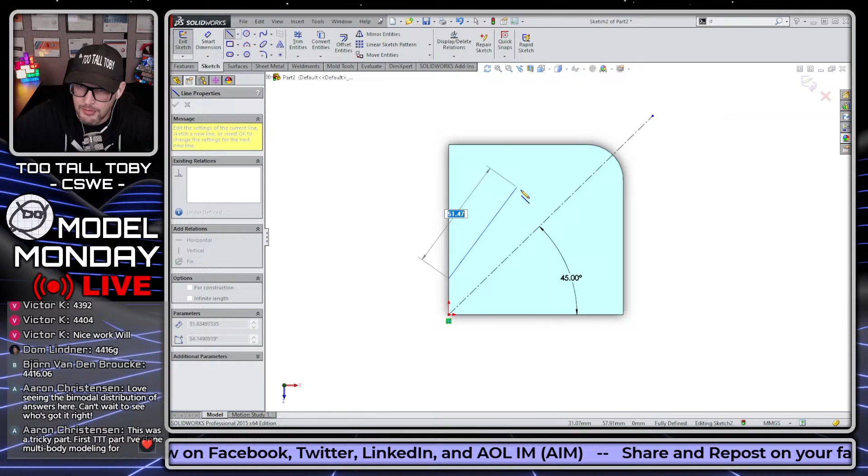I begin the line command, click here, move up in this area. Look, there's nothing that says parallel, nothing to pick up on here that says parallel. But if I hold my cursor over this line first and then move back over this line, back into this area, now you can see that I'm getting a parallel relationship. So that's how you pick it up. You don't have to draw the line, hit escape, pick one, hold control, pick the other, let go of control, parallel — you don't have to do any of that.

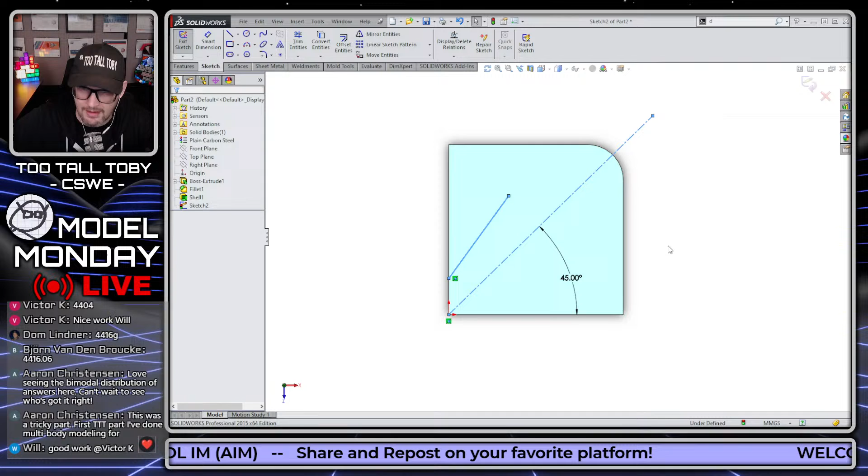If you just start the line, hold your mouse over that other line, and then move back over, look, now we're going to get a parallel relationship between those two. Pretty cool, right? So the way you activate that is you hold your mouse over the entity you want the relationship to, and then this is going to go vertical, and then come back over to this edge, and then close off here.

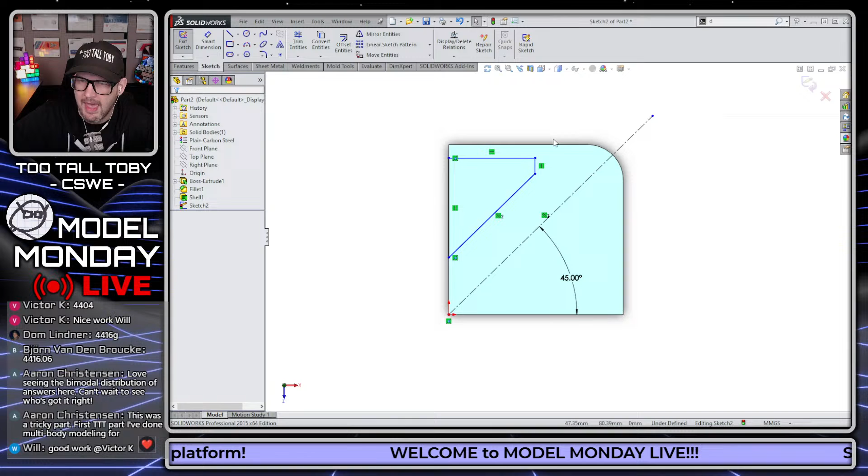And so now I've created the opposite of the shape of that rib. I can then take a dimension here, smart dimension. We'll make this a smart dimension at 7 millimeters, because the default wall thickness is 7 millimeters, and we'll create a dimension here from this edge to that line at 33 millimeters.

And then we'll create a mirror of this geometry. So we can just take a window here around all this geometry. In one of my Power Move videos, I talked about adding the mirror entities to your context bar. So mirror, that's going to mirror that all the way across.

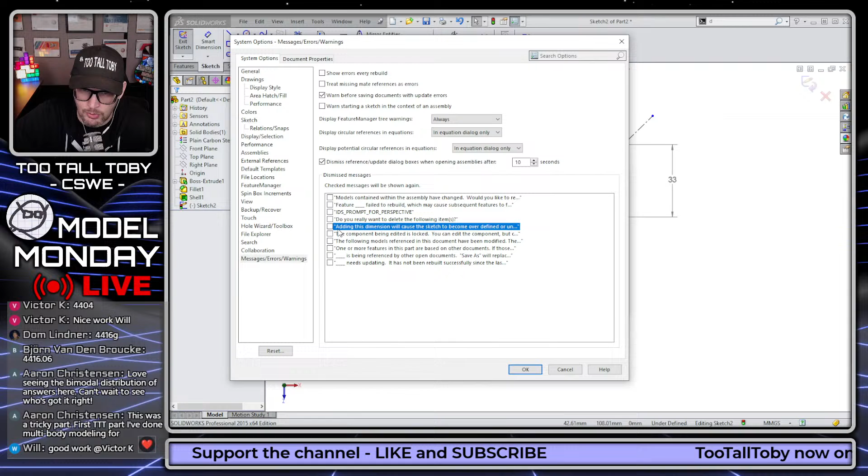Now, if we want to, we could add some additional dimensions just to make sure our values are correct. One of the things I did a long time ago in SolidWorks - well, I didn't actually do this in the options - I got an error saying adding this dimension will cause the sketch to go over defined. So let me check that so that it comes back. You know how when you're adding dimensions, if it's an over-defining dimension, you always get this box on screen.

You get this box here, make this dimension driven. Well, if you just say don't show me that again, make this dimension driven, don't show me again, then every time you add a dimension just to kind of confirm a value, it automatically shows up as driven and you can move on. Now if I'm going to add this, one's going to be driving, but that's kind of a little trick you can do also to save some time.

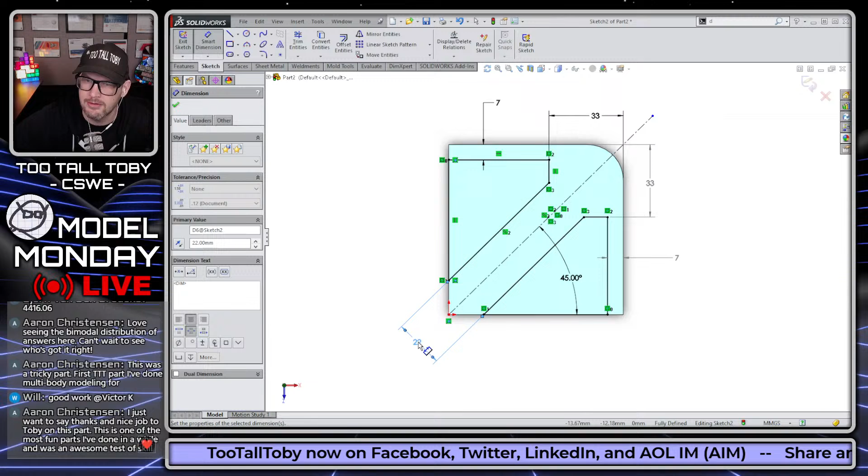So this is going to be 22. And then again, if I wanted to just check that against the drawing, you can just go in here and look, now that automatically shows up as driven. Kind of cool. So now what we're going to do is take this model and this sketch and do a cut extrude.

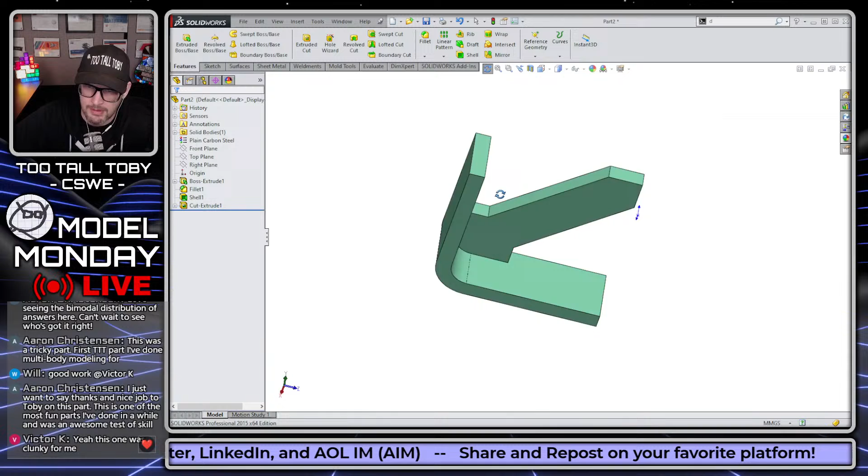So S key, extrude cut, and then right mouse button, through all, right mouse button. And there we go, that cuts that geometry away. This is looking pretty close to what we want.

Now we're going to use a little trick I actually learned from Aaron C, through proxy, but through Aaron C. If we select a face of the model, you see here in the tree you have this folder that says Solid Bodies 1. If you select a face for the model, expand that folder, hold control, pick that body, and let go of control.

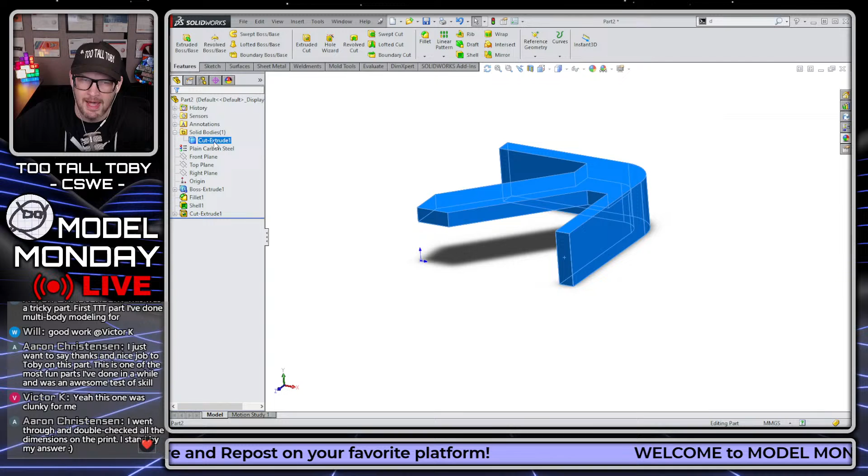What I've done is customized the context toolbar that shows up automatically, and added the mirror feature command. So features, mirror, I drag and drop that on there. So now you see I've got the mirror there.

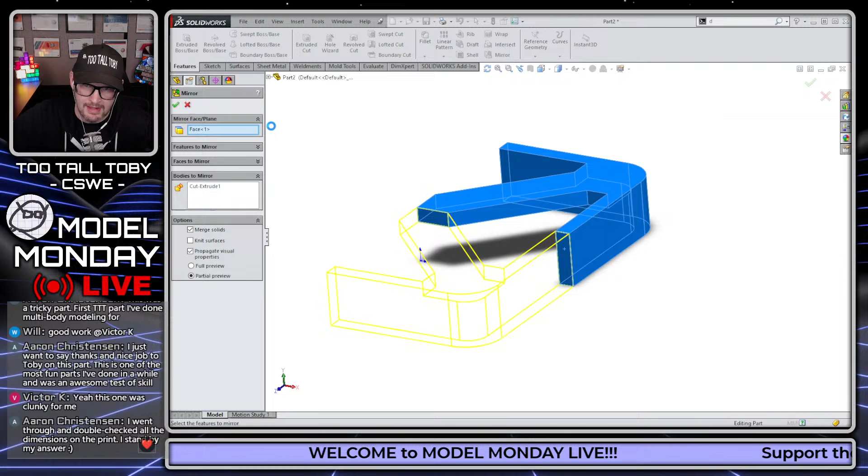So anytime I want to do a mirror all, I just pick this face, hold control, pick this body, let go of control, mirror, move my mouse a little to the right, and right mouse button. That is a super fast way to do mirror alls, even if you're doing them across a face.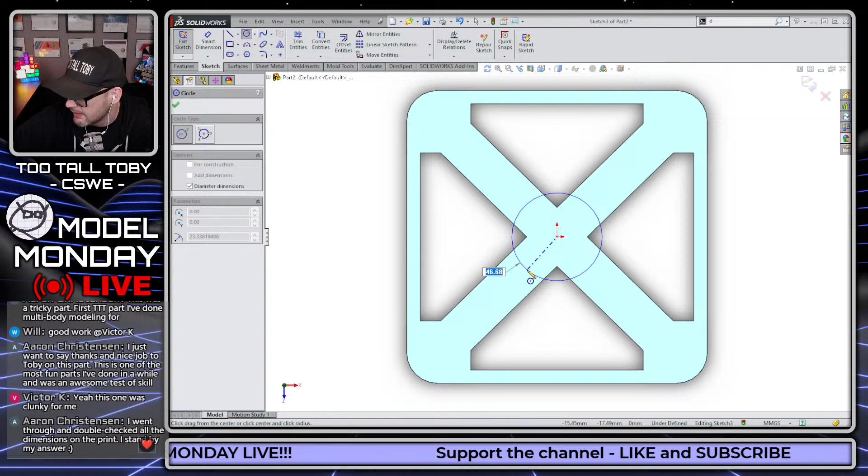Now I've got to do my final circular extrusion here. This is going to be at a diameter of 42, great number. We're going to extrude that up to a height of 50 minus 26 in that upward direction. Then in direction 2, we'll go up to surface, or I could go up to vertex, but I'll go up to surface to keep this clean. It's going to go up to this surface here, and there we go, that gives us that shape.

Now to finish this off, I just need to do a hole wizard hole. So hole wizard, this is going to be 14 through by 30 counter bore by 10 deep, and that position is going to be right here on the origin. There we go, final spin. Looks like it matches the drawing.

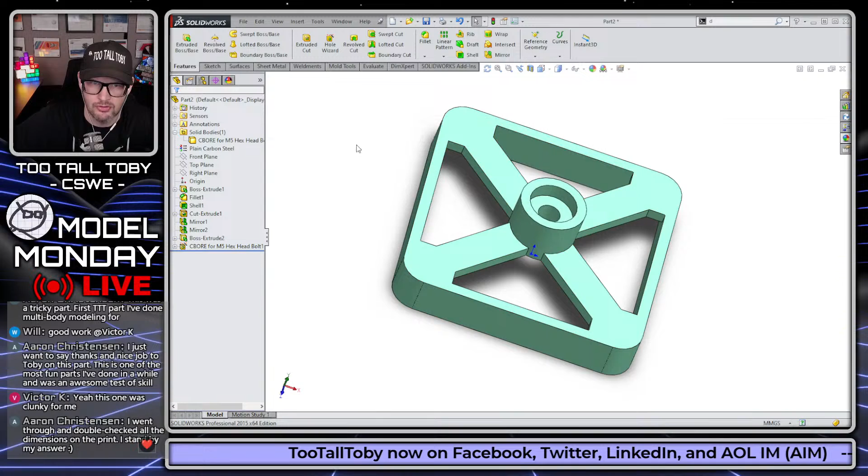Let's do a control Q to rebuild everything. Let's look at the mass. Looks like the mass is showing up here in my sensor at 1441.

Now we are going to go back to the practice models app and input that value. Or in this case, we're going to take a look here and see, did we get it right? Oh yeah, 1441 is the correct answer. GG, Toby. We did it. We got it right, 1441 is the correct answer.

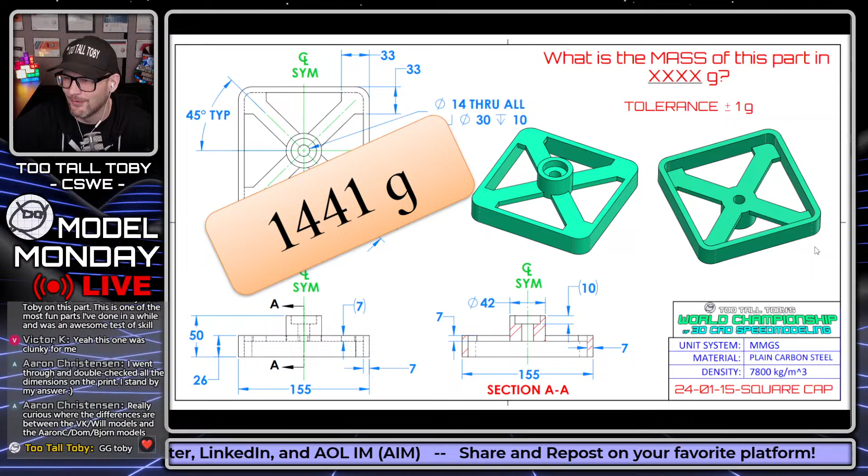So that is the live solve of this 24-01-15 square cap. I hope that was helpful to everybody. I hope you guys learned some cool tips and tricks on that.

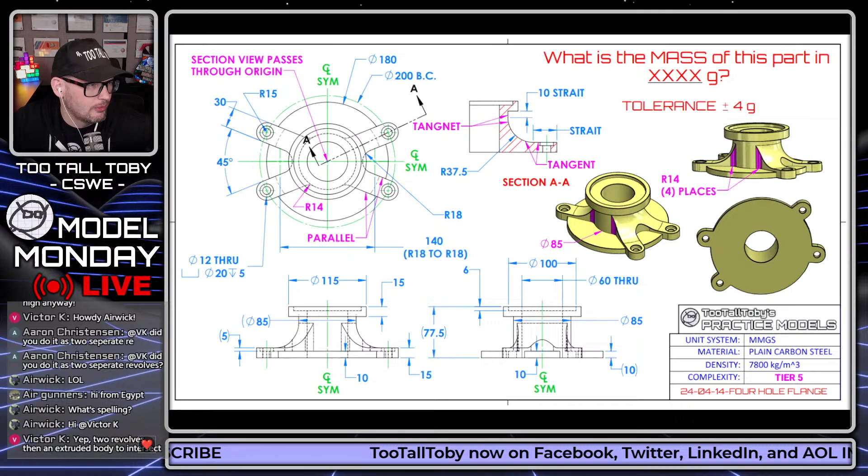All right, let's see here. Can't wait to see who got it right. So the tricky part, first TTT part I've done multi-body modeling for. Oh nice, multi-body modeling. Very nice. So I want to say thanks to Toby, nice job on this part. This one was one of the most fun parts I've done in a while, and an awesome test of skills.

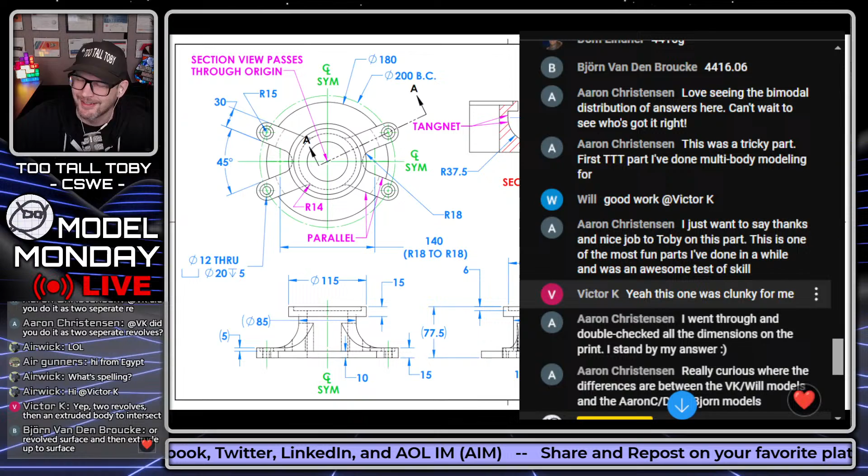Yeah, this one was clunky for me. I like how Aaron's sounds very positive, and Victor K is like, this is a clunky ass drawing. I love it, I love it. All right, here we go.

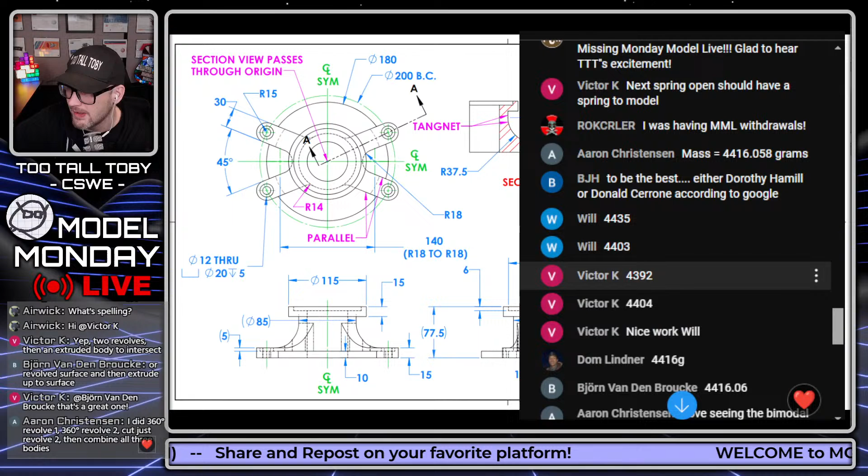Let's see what the answers were that came in. First answer came in from Aaron C, 4416. Will from Brazil, 4435. Will revising 4403. Victor K 4392. Victor K revising 4404. Dom coming in 4416. Bjorn coming in 4416. Love the bimodal distribution of answers here.

Nice, Aaron C's got ChatGPT plugged right into his YouTube comments. I like that.

Went through and double checked the dimensions for the print. I stand by my answer. Yeah, very nice. Really curious as to where the differences were in some of these models. I think I know where I might have went wrong, but already closed my model and screenshot. Maybe a radius wasn't tangent somewhere. Yes indeed, yes indeed, let's see.

Any more answers on this one? Don't see any more answers coming in, so let's see what the correct answer is. And by the way, congratulations to anybody who finished this one. This is a tier 5 model, very challenging to finish these in just a few minutes, 15, 20 minutes. Let's see what we got here for the correct answer. The correct answer is...

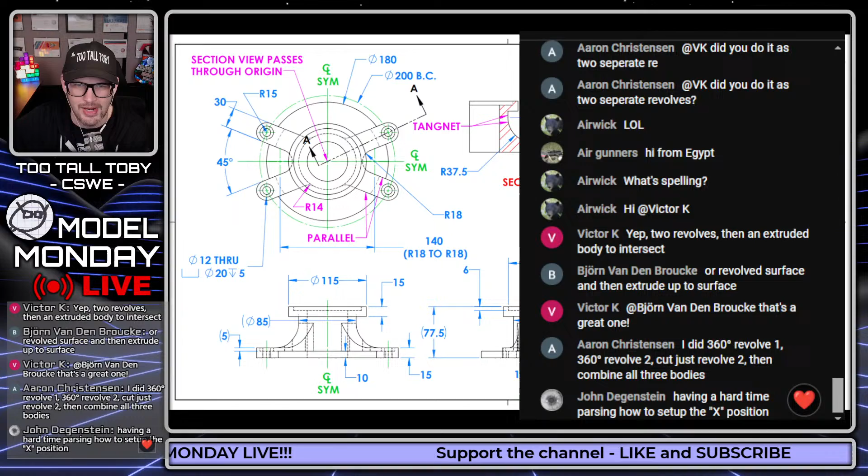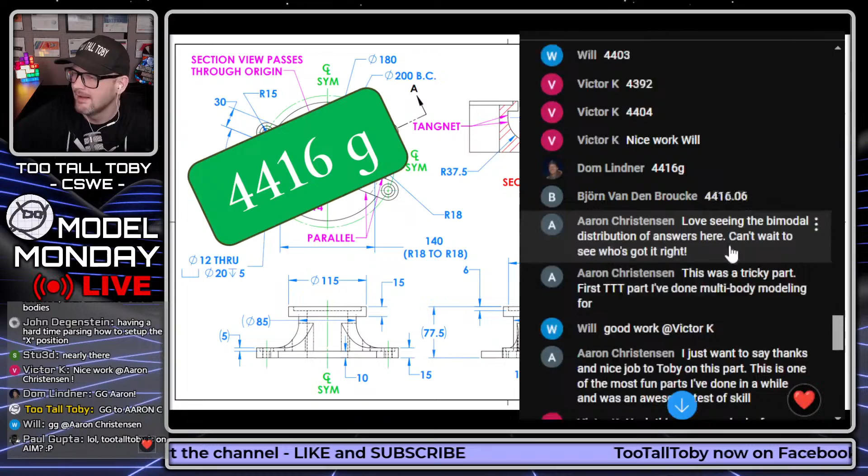4416. Yeah, so who was the winner on that one? None other than our good friend Aaron C, coming in with the correct answer. GG to Aaron C, well done. Congratulations, great to have you back in here again. Comes back after a few weeks away and right away gets on the leaderboard. Well done to Aaron C, and congratulations to everybody who finished that one, or even anybody who tried it.

I will try to remix that out as a practice models video at some point in the next couple of days. So if you didn't get a chance to try it here, I'll throw it up on YouTube so you can try it there. I'll probably also remix it into one of the April practice models.

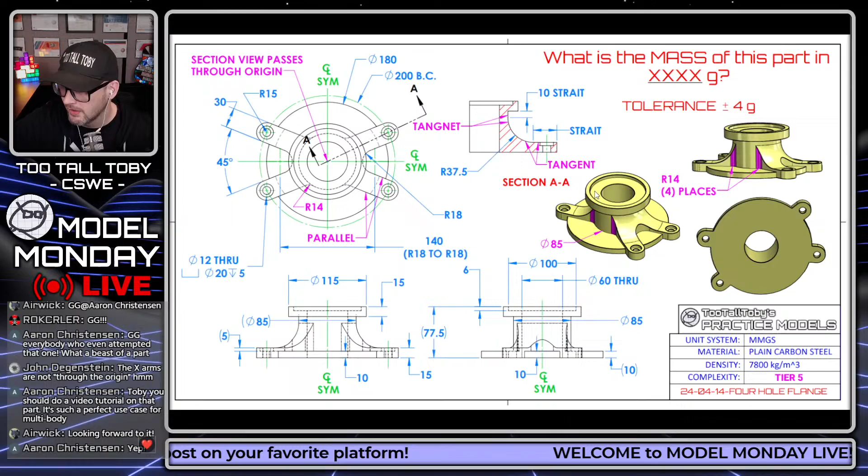Aaron C says, Toby, you should do a video tutorial on that part, be a perfect use case for multibody, on the 4-hole flange. Is that what you're saying, Aaron C? If so, we could definitely make it happen. Do a live solve, maybe we'll do an Onshape live solve on this one. Okay, all right, thank you. Great suggestion from Aaron C there.